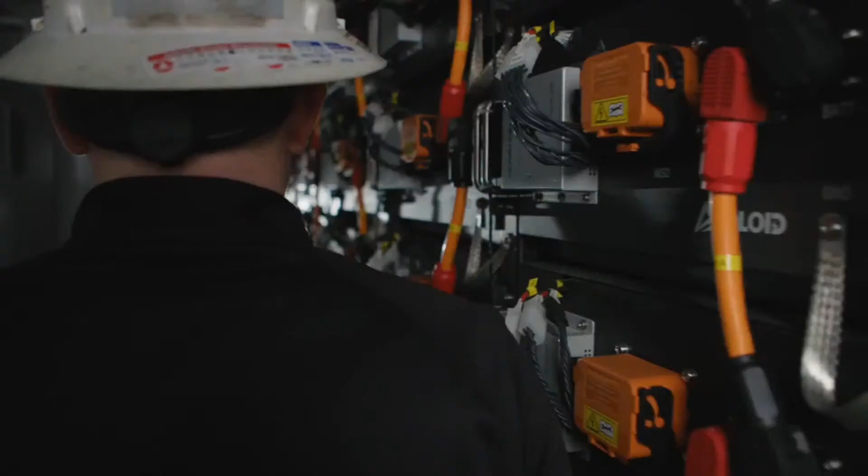Our newest alternative power technology is perhaps the most exciting, as Patterson-UTI expands the use of lithium-ion battery technology in our rig fleet. EcoCell is an energy management system that uses stored energy to decrease the number of generators needed online, and keeps generators running in their most efficient power-to-emissions ratio range.

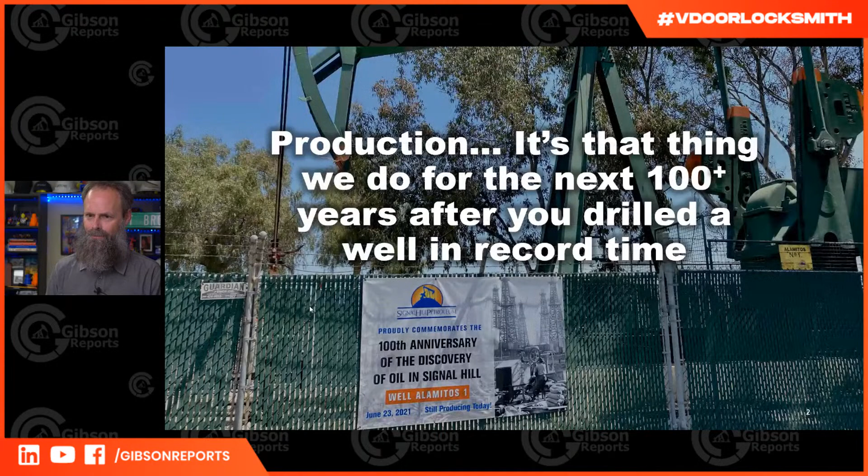Production is the thing we do for the next 100 years. This well, I took this picture in the background here - this is the Discovery well in Signal Hill, California, about 2 years ago during the pandemic. It hit its 100th anniversary, and all the stuff I'm going to talk about today, all the dynamometer cards and rod analysis, came in way after this well was drilled. So we're constantly learning new things - this is proof of it.

This well is still pumping - I drove by it recently. They don't have the sign there anymore because it's not the 100th, it's the 101st or 102nd anniversary now. But this well is still producing fluid. So when you drill a well, just remember it might be around for another 100 years. I love that slide - if you come out to California, I'll take you right by it.

All right, so rod pump - it's the most common artificial lift method. Everyone that thinks of the oil field thinks of the pump jack going up and down in West Texas. The first thing you need to understand about rod pump is it doesn't actually suck the fluid out. I've been in the industry for 20-something years now, and when I first got in, I didn't realize it's a long steel rod that goes down to a pump at the bottom of the hole.

Can I do a mouse over here? Does that work? Yeah, see that? So you got this long rod string attached to a downhole pump, and it's basically just two check valves that alternate and lift the fluid. It basically pushes the fluid up from the bottom. You get thousands of barrels a day, all the way down to stripper wells that barely produce anything - so it's a very wide range of production you can get out of a rod pump. Again, the rod pulls up on the pump, gravity pulls it down, and it pushes the fluid to the surface.

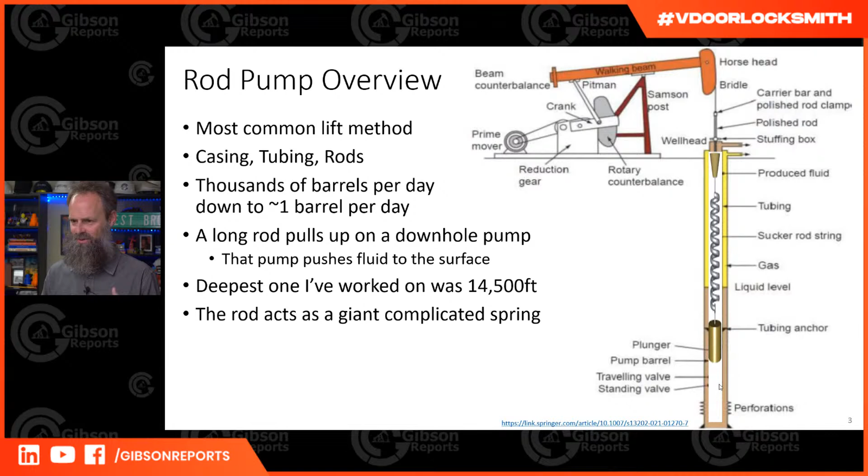If there are any questions, feel free to stop me. I'm just trying to soak all this in. So yeah, keep going.

I just put this slide in here so you can zoom in and see what the pump looks like. There's all kinds of variants of this, but it comes down to the same concept: you have a standing valve that's fixed, attached to the tubing. That valve is called the stationary valve or standing valve. It's stationary.

When you lift up on the plunger, which is this guy right here, the moving part, kind of the yellow or orange color - that's the moving part. So when you stroke the well, you lift up on the plunger. That traveling valve carries the fluid load while the standing valve opens. We're lifting right here. The traveling valve is closed, and fluid is entering the pump through the standing valve. So that's lifting fluid up, but it's also recharging the chamber of the pump.

And then here we go to the downstroke. This is right at the start of the downstroke, so both valves are closed. Here the standing valve closes, so now no fluid can fall back out into the casing annulus, and all the fluid transfers from the pump chamber up above the traveling valve, so that when we come back around to the next stroke, the fluid can be lifted.

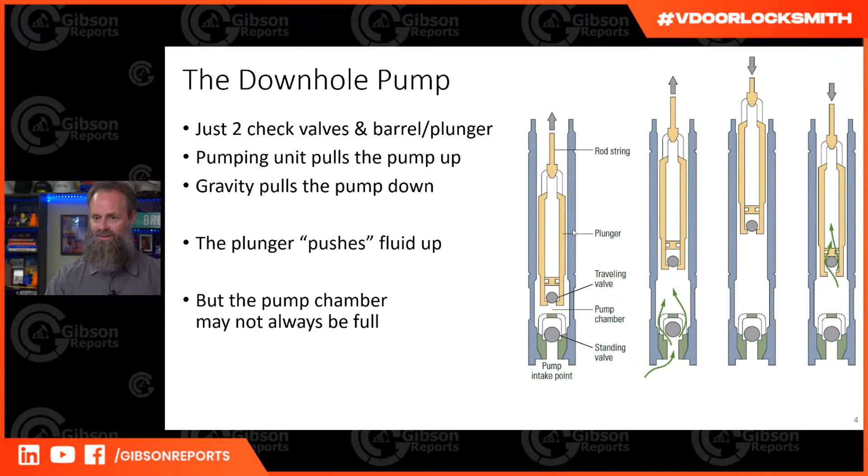So, all right, deviations - this is the crux of the issue here. When you have deviation... you know what, I should have - can we switch back to the thing? I didn't really talk about the configuration.

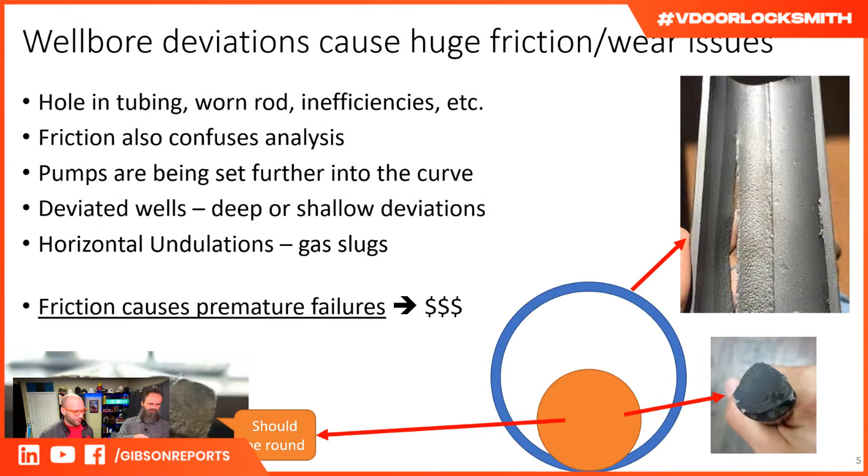You've got the casing, you all know that from drilling. Before I left, I took a piece of plexiglass tube and got the heat gun out and bent it to make a crooked wellbore.

In the rod pump world, we take tubing - I'm going to use this white tube, that's the production tubing. We stick that into the wellbore. The pump's down here at the bottom, you can't even see it. All the fluid's going to go up through this inner tube, the production tubing. And then we have the sucker rod here that goes in through the production tubing, and it's just stroking up and down through it. So you can probably see that where you have this crook in the wellbore, it's going to wear a hole in the production tubing, right?

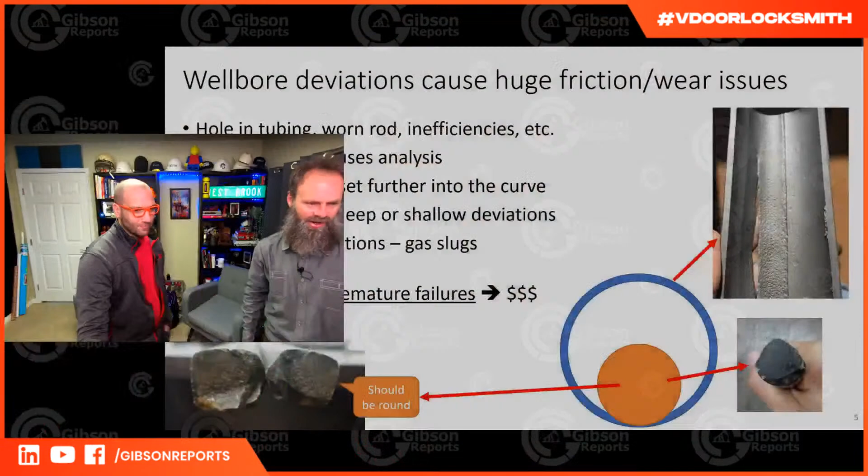So I have pictures — can you switch back to the rod cut? So up here, this is a piece of tubing that they cut in half so you can see it, but there's a nice track worn in here, and it just blew out. A hole in the tubing blew out. We got to pull the whole well and replace that joint of tubing because there's a deviation there.

Now, before I came here, I got some buddies that work at a pump shop in LA, and they gave me some pictures. These are the sucker rods. This guy right here, so this — oh, I gotta go over here. Yeah, then they'll see it. All right, there we go. Oh, there we go, all right.

So this should be a round rod. I mean, this is crazy — this is a square. It went in a round peg and a round hole, and it came out a square peg in a round hole because of the wear.

This guy over here is worn on two sides. The reason it's worn on different sides is because we do rotate the rods to even out the wear, but when it's so bad, the rods just kind of flop into their little track and wear on one side, then move over to another side and wear on that side, and then move over.

This cross section that I drew here, this is the production tubing, and this would be the rod. So right down here, this is where it gets pretty dicey — pulled into the side because of the side load, because of the deviation, and that's the wear. This is the wear that you see here, and then this round rod — this should be a round rod — was worn on this side because of that side load.

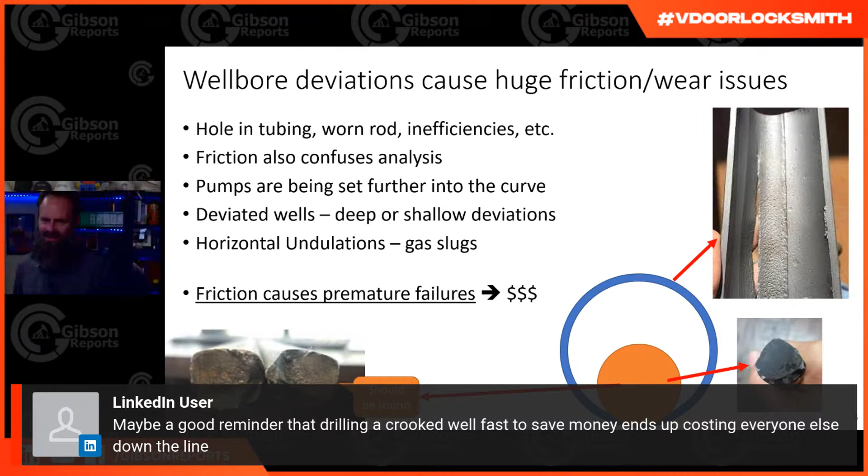I do have a lot of questions about speed of drilling wells. A lot of what I think is the problem is when they screw something up in the drilling and then they got to sidetrack out. I have a great story about some folks — I was in Oklahoma City, but they were from Colorado — and they were showing me pictures about this well. It would look kind of like this, but worse. And they're like, yeah, we got a week runtime on something like that. Like, what the hell, what's going on? What do your wellbore surveys look like? And they're like, well, we got the drilling surveys, but it's kind of missing that like 500-foot section where we're having all the trouble. So what happened? Well, the drilling guy screwed something up, and they just lost the survey for that.

And so stuff like that — when we get these drilling surveys, the points of interest never have the data that we need on the drilling surveys. So we come back through, and I got some slides on that. We run gyro surveys through the tubing so that we can actually really get a better idea of what the wellbore looks like. Wow.

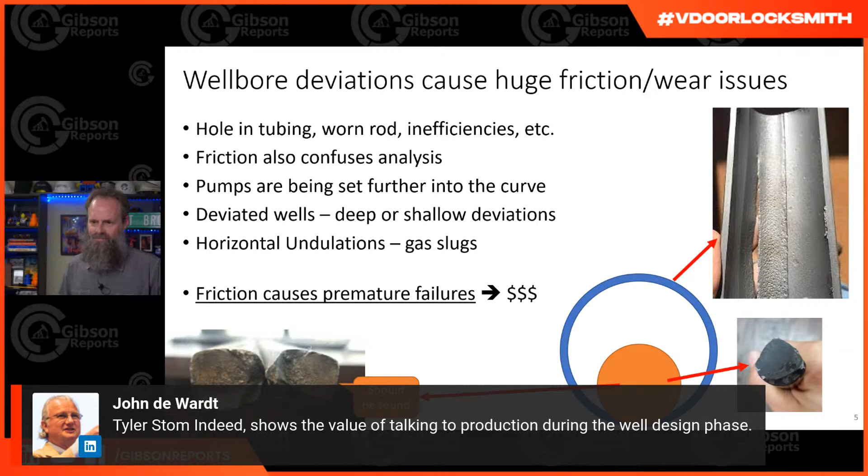John de Wardt says, Tyler Stom indeed shows the value of talking to production during the well design phase. Yeah, I love it. Yeah.

And if anyone wants to reach out, I know lots of folks that work in lots of companies on the production side. I can connect anyone up to talk more about this, because it's not just drilling. I got a slide about Wall Street. It's people saying, hey, can we really get away with that 5.5-inch casing? It's so much cheaper, let's just cheap out on something. It's not necessarily drilling's fault. Somebody made a financial decision that is now negatively affecting the next 100 years. So keep that in mind. If you're drilling a well, somebody like me is going to have to deal with it 100 years from now, hopefully.

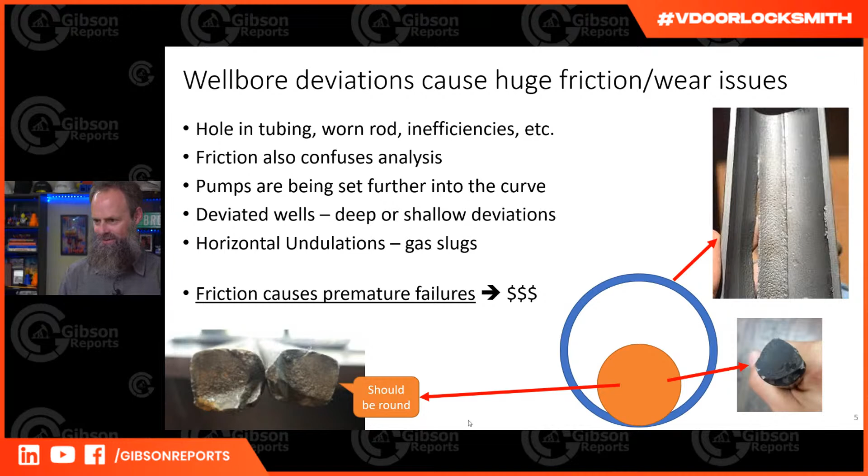Wow. All right. Let's move along. Let's go to the next. Can I get back on? Yeah, yeah, yeah. All right, sure, you're good.

So I talked a lot about this actually. If you think about it like compounding interest, every time you pull a well, that discovery well, every time that well gets pulled, it costs some amount of money. So that builds up over time. So what you're saving right now putting that narrow casing in, or not fixing that sidetrack and getting it nice and straight in that area, that's just going to compound over the life of the well.

So I don't have dollars in that. I reached out to a guy that did give me some dollars. When we have friction in a well, remember we got this big spring pulling up and down on the pump. Some of that work is being wasted to friction. So it basically makes the effective travel of the pump less. If you're stretching the spring every time instead of lifting the fluid every time, you're wasting some of that work.

That work you're doing at surface is just stretching that spring because of the added drag. So he worked out, it was like, I'm just going from memory, about 3 feet of every stroke was lost to drag because he ran out of a straight well, and with their deviation survey, the drag load on that pump made the spring stretch that much more. So he came out to like, I don't know, 500,000 or 5 million, something in there of lost production just from wasting that 3 foot of stroke every stroke. This is happening every day, 24/7, at probably 5 strokes a minute. When you work the numbers out, the cycle times on these are crazy.

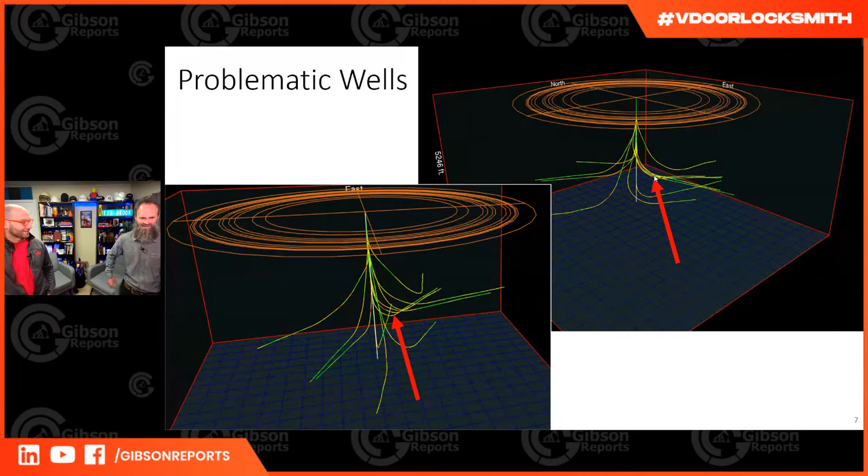Cool, all right, okay. So now, geez, we're 42 minutes in. No, hey, we've got plenty of time.

So I've got to talk a little bit about how we analyze rod pump wells, because that feeds into why I'm here and why I'm trying to talk about this drag analysis. We use a thing called a dynamometer, very similar to what you'd use on a dyno on a gas engine. It's a measure of work you do over the stroke. We instrument the well for load and position. The load is easy—we do a time-sampled load or weight, that's how many pounds you're lifting, and what the position of that load is throughout the stroke.

I'll show you the simplified position. I said position is a bit more of a challenge—there's some fun stuff I'll talk about with this tool. Basically, there are a bunch of different ways to get position. You can do it with an inclinometer, or with proximity switches on the crank arm—every time it goes around it gives you a top stroke, and you interpolate between those.

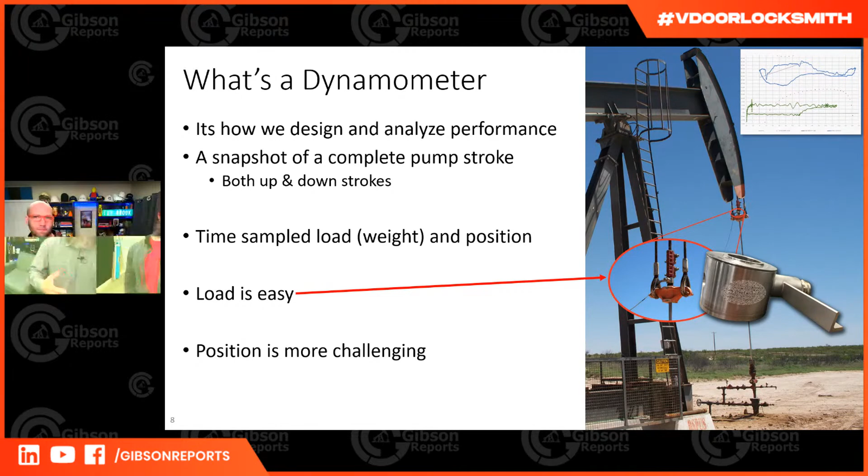All right, real quick, we've got a question from Ian. It says, how deep do the sucker rods typically go?

I don't know if there's a typical well—it can go from hundreds of feet. I'd say probably 1,000; you could have 100-foot wells. Usually about 1,000 feet down to maybe 15,000 is probably the deeper limit. Again, it depends on production rate. The 1,000-foot wells in a water flood making 1,500 barrels a day of producing fluid—you're not going to get that from a 15,000 foot well. It's just a matter of how much you're lifting.

The upper end, or the deeper end, is 15,000 feet. That's probably the easiest answer to that question.

Yeah, you might have to click there. There you go. You're all good, right.

So this is a wacky animation of the dyno, showing load and position. We gather those over time, but then we plot them against each other. This was my attempt to show you where they're coming from. I took a position plot, rotated it over, moved it to the side, and animated it. This is how you build a dynamometer card, by taking the load and plotting it against the position.

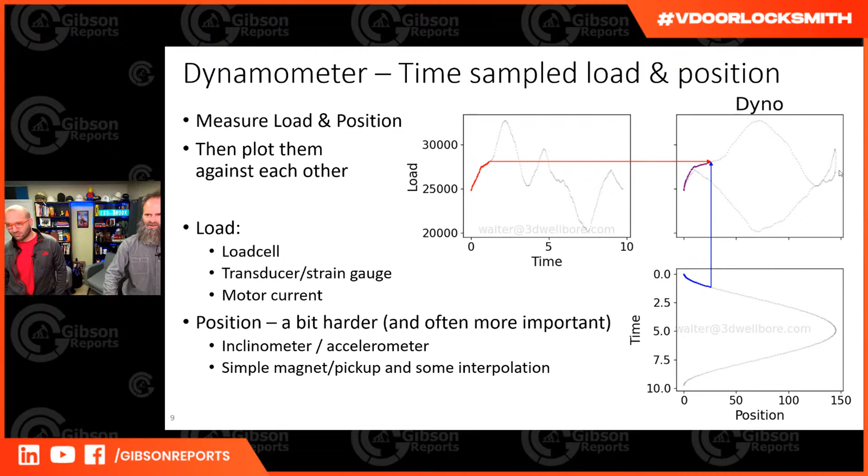And then here's just another view of the dynamometer. So I put this time-lapse picture up here. This is kind of like a snapshot of one stroke, so you're looking at the entirety of the stroke in one picture.

So here we have, I'm talking about work or power. We have horsepower, so 1 horsepower is 550 foot-pounds per second. Here's the foot dimension, here's the pound dimension, applying those against each other. And then there's this whole time concept of, this happened over one stroke, or, I don't know, I should have looked at how many strokes per minute this has.

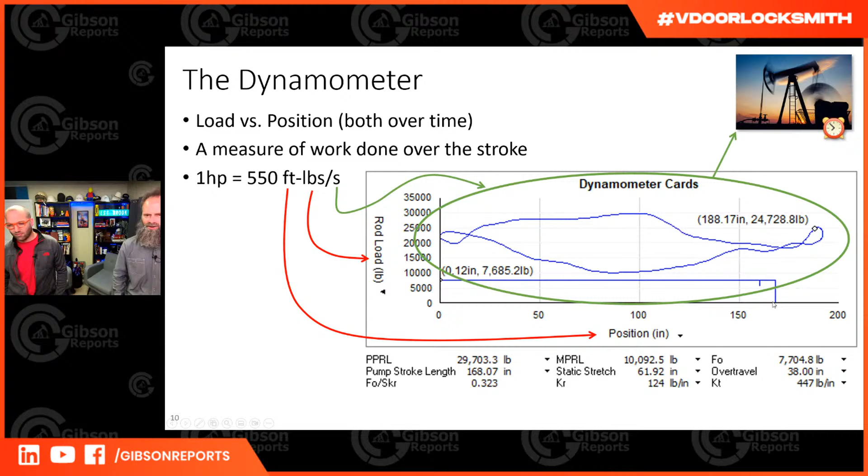Let's say this was a 10-second stroke going around. That amount of work has happened in that time. So we can actually take the area of this plot and give you a power, like how much power did it take. And then I'll also talk about this rectangle thing down here. This is a calculated downhole card. It's the same concept, but it's removing all of the stretchiness. I'll talk about that in a couple slides.

So the surface dynamometer cards, most of the ones I've been showing you here, are these wobbly, complicated things that are hard for people to understand. I mean, when you've been looking at it enough, you can look at a card and go, oh yeah, it's going fast, it's going slow, but can you really tell what's going on?

There's all these inertial dynamics. There's the crank arms accelerating, speeding up, slowing down. The rods are stretching, sometimes they're moving, they're starting and stopping at different points in the wellbore if it's really deep. It's hard to look at these surface cards and really see what's going on.

The fun story about that is the guy I'll talk a little bit about, Sam Gibbs. He was getting his math models going right around the same time, and they were going to use this to do all the design and simulation. And he comes in and says, 'Well, I can just calculate this. It's just math. I can figure how to build these cards from math and not have this crazy analog computer.' I think it had springs or something. I don't even know what that means.

But it shows the work done stretching and accelerating the rods, work wasted to friction. But we really only want to have a snapshot of what's happening at the pump.

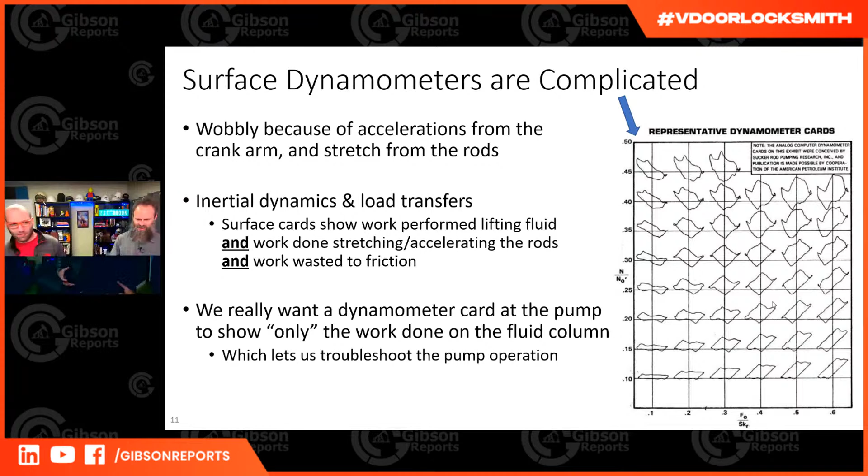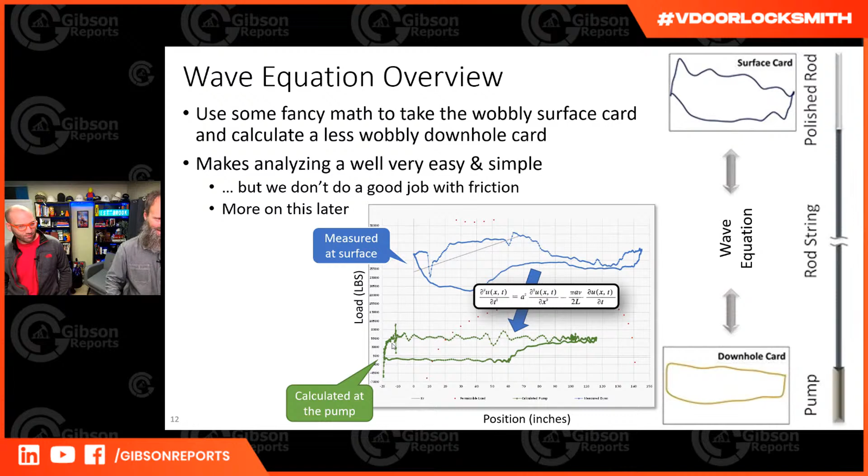So now there's some other things that happen in there. We don't really deal with friction so good in this model, but that's actually the point I'm trying to get at here, in the second half of this talk, which is going to be quite long. So in the 60s, this guy, Sam Gibbs, he comes out with this paper.

I put the paper number up there. So anyone that knows SPE papers, it goes to OnePetro. I mean, paper 588 - that's how long ago this was. There's 10,000s or 15,000s or whatever now. So he figures out this math and simplifies it over the years. That's what we use - we call it the wave equation.

I guess this is probably where I should stop and ask questions, because this is the part that - no, keep going, keep going.

Yeah, the simplification that the wave equation gave rod pump analysis made it so that we could look at a well and say, oh, this is what's happening, we need to pull this well, or oh no, it's doing this. So that was great in the 60s through the 80s and whatnot, when we were drilling basically straight wells. But now that we have super gassy wells and crooked wells, it's not as easy as this.

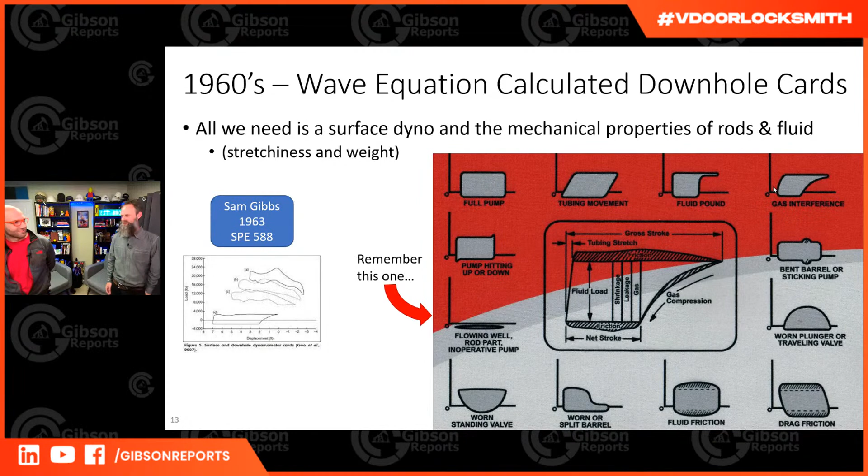So I'm going to try to apply the wave equation, using this concept of the rod part, to see where the friction's happening in the wellbore. That's the tagline of the next half of this talk.

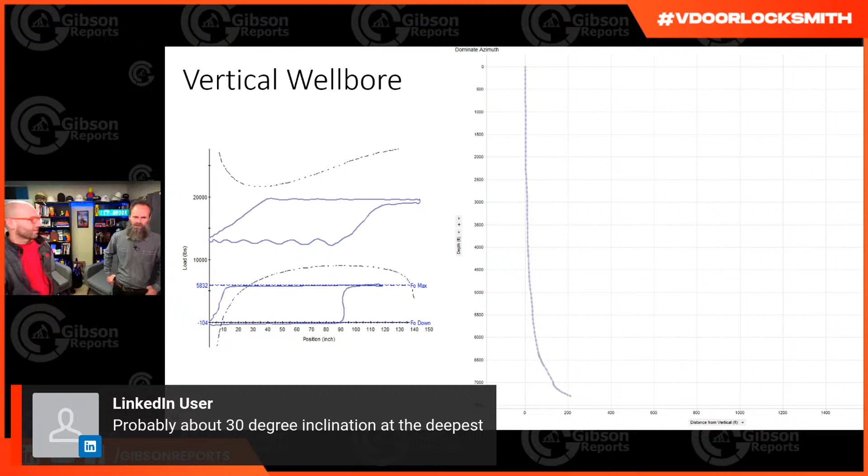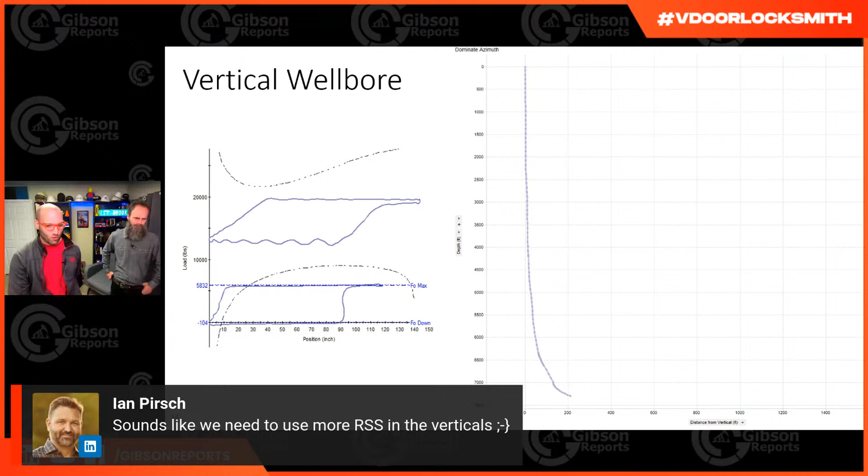Right, and John Dawson, or a couple of comments here - we've got, probably somebody says probably about 30-degree inclination at the deepest. I'm not really sure, that was probably. I mean, people run pumps way on the horizontal too, the pump itself will run anywhere. And then Ian says, sounds like we need to use more RSS in the verticals. And then John Dahl says, mouse pad is 1960s artificial intelligence.

So, all right, yeah, all right, let's keep going. All right, over here.

All right, so we did a presentation. One of the things that I'm involved in is a downhole dynamometer project, where we're actually trying to measure these dyno cards downhole.

They did a version of this in the 80s, where they built a tool that would go down in the rod string and gather these dyno cards. It proved the math worked, but they only did those on straight wells. So what we wanted to do is redo that project on deviated wells, because we don't really handle friction in the math as well as we should. We want to see how we can improve our models. I stole these 3 slides from that presentation.

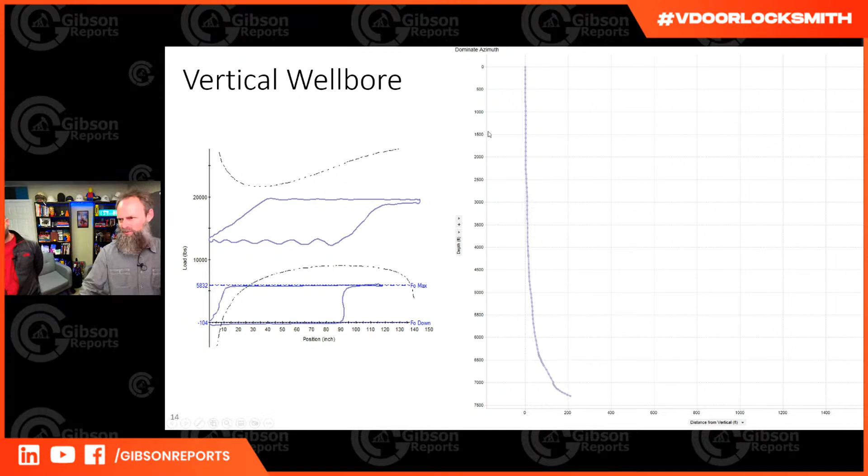So this is a relatively vertical wellbore, nice, kind of straight, maybe veers off a little bit. This is actually what I was talking about with the dimensions. We go from 0 to 7,500 here, but from 0 to 1,400 there. So we're like 4 times taller than we are wide. I don't think I did the math exactly right there, but this is squished - it's exaggerated. This isn't as bad as it looks.

But when I look at this card, I can see that this well's probably running relatively slow, but it also has some unique shapes here. Go to the mouse pad, look it up, and we can see maybe a little bit of tubing movement. It's got this little slant to it, but really we see this signature right here - that's fluid pound. So we can analyze this well and say, okay, that's what's happening.

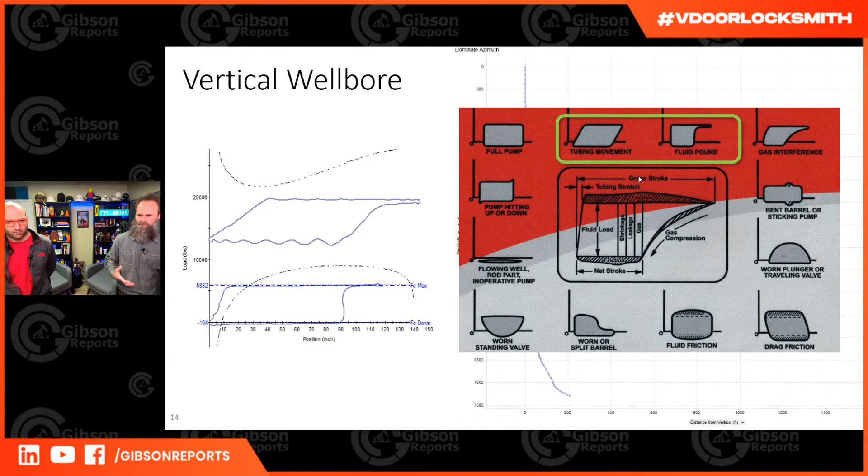So on our controllers that control the well, we can change the set point - it might slow it down, or it might stop the well. If we have a VFD on it, we might slow the well down so that it matches the inflow to the pumping rate. But when we start getting deviations, here we have a deep deviation.

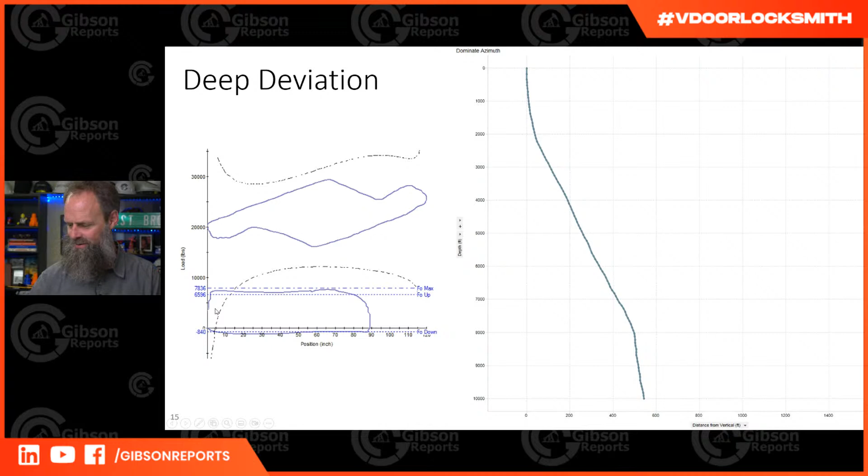Here we have a deep deviation, and now it's a little bit wonkier. It's kind of rounded over here, kind of rounded here a little bit. Could we say maybe tubing movement? Let's look at our cheat sheet here.

So what's going on? It's not the top left one, I can say that as well. It's definitely not a flow. I mean, it's probably a full pump, but what is it? Can we really tell that? Can we tell if something's going wrong here? It's probably not the pump hitting down - we'd see a tag, what we call a tag, a little load increase.

It's probably not a bent pump barrel. If you didn't realize that this was a deviated well, you would say hey, this bump right here might be a bent pump issue, but it's not really.

This is probably more of a fluid acceleration, a worn plunger or traveling valve causing this rounded over shape. You might look at that and say that's what's going on, but I wouldn't be confident in that. And fluid friction isn't happening there - it's probably drag friction, but where in the well is that? How bad is it? What is that obscuring as far as further analysis?

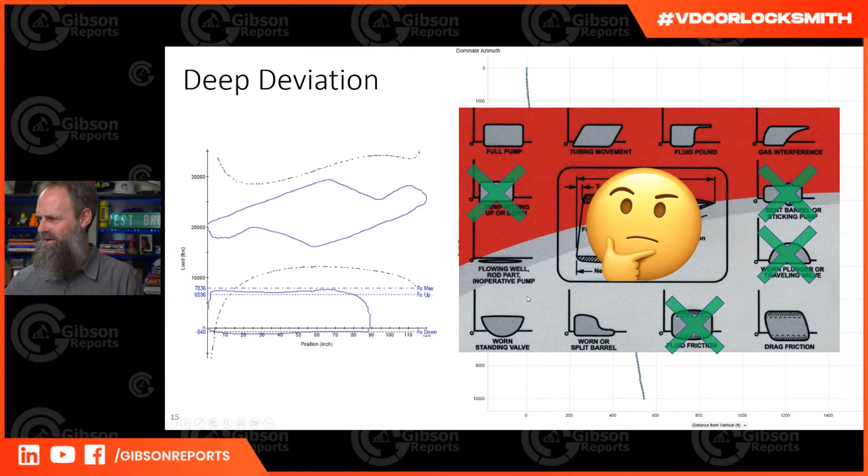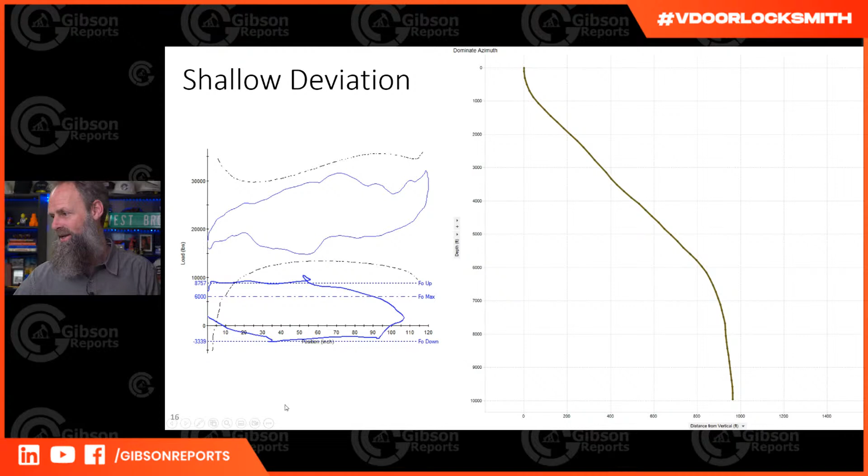And now here we have a shallow deviation. These are the really tricky ones, because not only is the load increasing, which is increasing the side load, which is then increasing the tension load - so that screws everything up. Now you got this downhole pump card that you'd hope would be a nice rectangle, but now it's this weird stretched out, twisted up thing. So you look at this and you go, I can't tell what's going on in that well.

Well, what's going on? I mean, we're just going to run it until something breaks. I mean, that's unfortunately how most of these rod pumps end up.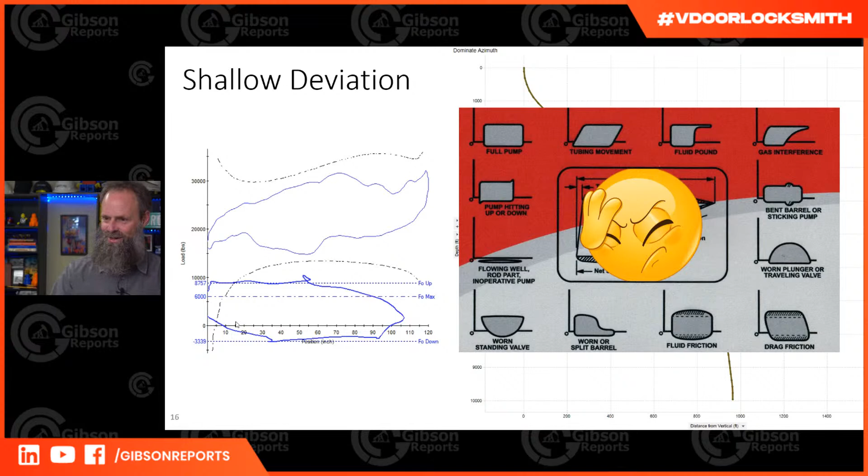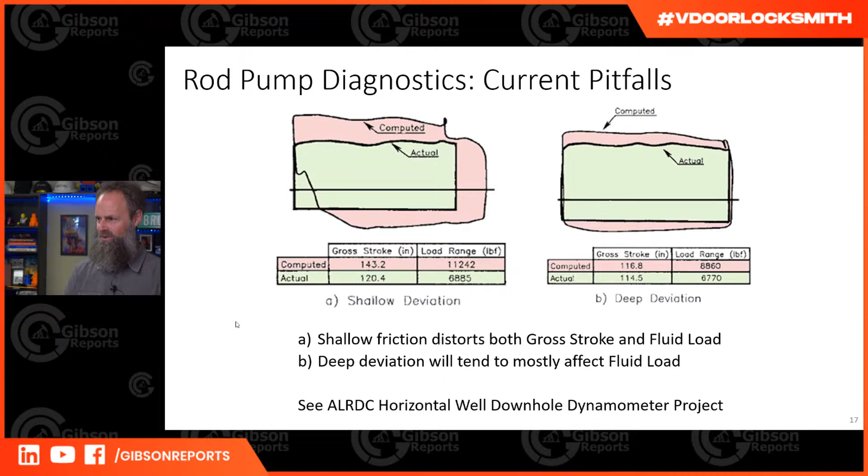And here's just another shot of this - so we have the computed cards and the actual cards. This project that I was talking about, we're actually building a tool to go downhole to measure these cards in the well in deviation, so we can better adjust our models to include friction. If you have any questions on that, give me a shout.

Yeah, I did this - I put this in an SPE paper, I wrote this a while ago. Some of the 3D wellbore stuff that I did, I realized hey, I can use that same kind of plotting that I developed for that, and I could plot what's going on between the surface and the pump. So I just threw these in there because they're colorful plots.

So basically what this shows is each of these lines at a distance along the rod string. I'm recalculating, redoing the calculations at each step. It's a finite element analysis. There's a lot of cool stuff you could do with this because you're taking load as one dimension, position through the stroke as another dimension, and position as depth from the stroke, but then you also have this whole time component in there. There's all kinds of fun stuff here, a whole other topic I could talk for hours on, but basically it's a finite element analysis.

And that's actually one of the methods we use to calculate the cards. Finite differences is the mathematical term. I kind of suck at math, so that's about as comfortable as I am talking about that in public.

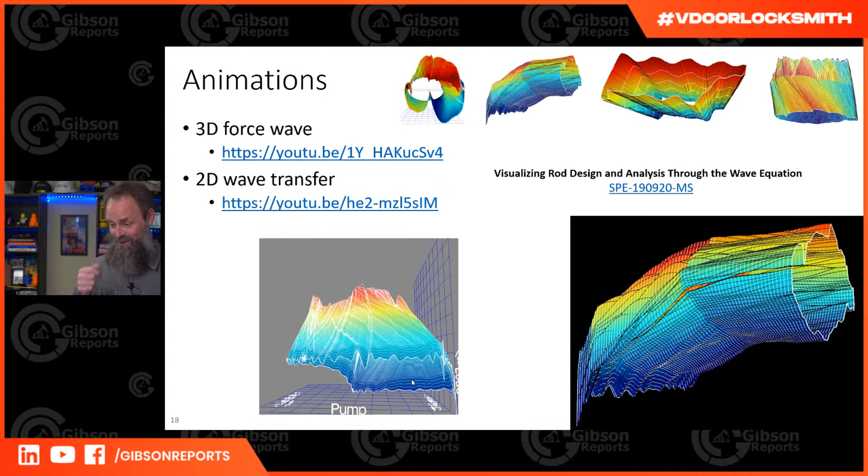Looks like you're a lot more comfortable with math than I am. Oh no, I'm just persistent. I worked through all of this, but it took me a long time. All right, I could play those videos, but we're probably running out of time. I posted them a while back. There's no time constraints. Well, I haven't even gotten to the fun stuff, man.

We have a LinkedIn user who says very informative. Thank you, I think this is a lot of new information for everybody on the drilling side. So there's definitely a lot to cover. Sorry if I'm going fast, I usually tend to be quiet 90% of the time, but when I start talking, I can't shut up. And I also steal a lot of presentations I've done in the past.

So I put this one in here because it's fun and it shows deviations, not just from drilling. When we put this tubing in the wellbore, we'll also put an anchor in it and stretch the tubing. It's kind of weird when you pump tubing that's loose in the wellbore, it acts like an accordion, shrinking and growing. The problem is all that slack goes to the bottom, and the tubing being slack at the bottom corkscrews around, creating side loads that impact the rods and wear them out. So if we pull tension in the tubing by anchoring it, we can stretch it out and keep it straight so the tubing doesn't deflect into the rods.

This came about with a guy up in Montana, wish I could name names but I don't know if I can. He was having issues because they were putting a lower grade of tubing in. It was a hot well, so they were worried that pulling the tension needed to overcome the temperature elongation would overload the tubing. They said, well, we can't pull that much tension with this grade of tubing, but we were getting deep rod cuts and holes in the tubing because that slack was ending up at the bottom.

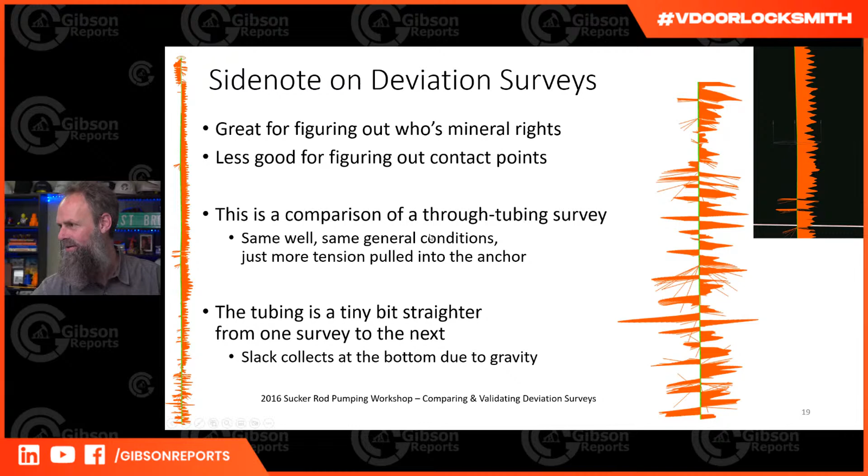There we go. Yeah, so I threw this in, it was part of that talk. My last dog, when I was doing this, she blew out her knee. I was prepping the slides - this is 6, 7 years ago - prepping the slides and the vet... I feel bad telling the story now. I mean, I told it then when she was alive. I'm like, I need that picture because I'm doing a talk on dog leg severity, and this is perfect.

It's literally the dogs. Yeah, so there's a whole thing, the golden retrievers, they blow out their knees. We got another one, so great dogs. But yeah, so we got the very expensive X-ray so that I could milk that X-ray for probably 3 or 4 different presentations.

So the point of this slide though is we always like these rules of thumb. Folks always say, hey, keep it under 3 degrees for your dog legs in your wellbores and you'll be fine. It's probably a good rule of thumb - if you're going over that, there's probably a problem - but I'd say it's probably not the best rule of thumb. The straighter the better. The deeper you are, the more you can deviate. If you're shallow, don't deviate at all.

Also, degrees per 100 feet - that's a terrible measure. I've had people ask me all the time, hey, I got these gyro surveys and it's running out to 90 degrees per 100 feet. Well, because there's confusion on how you scale. If you have a 1 foot survey and it changes a lot in 1 foot, do you just multiply that out by 100 feet and that's what your dog leg is, or DLS, for 100 feet? There's a lot of confusion in that world.

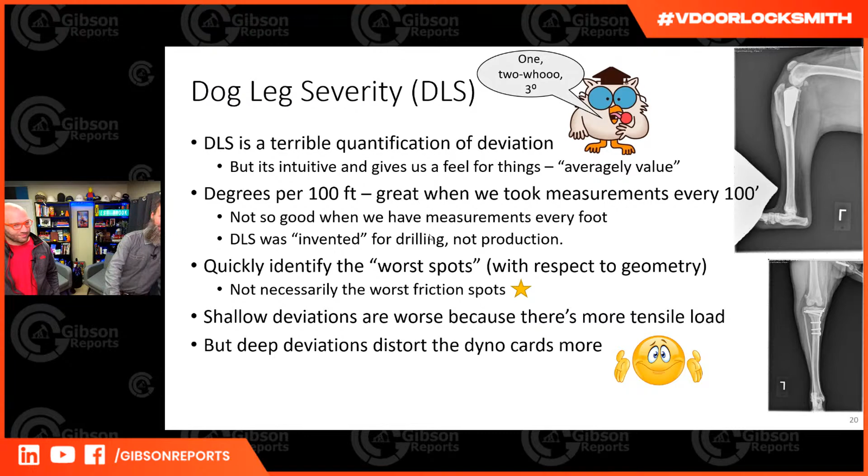So this is the guy that I talked about. He's the guy that invented the math. I was fortunate enough to meet him. He had this thing called the Gibbs conjecture.

This is probably the craziest theory thing that I'm going to throw out at you, because we don't adequately deal with friction in our calculations when we're doing these wave equations, or this wave equation math, at least on the measured side. So there's a whole other parallel side where we take theoretical loads and positions, but at the surface and at the pump, and we try to figure out what the pump should be doing.

There's two different approaches to this. There's the diagnostic approach that I've been talking about, but then there's also the predictive approach, where you try to figure out, hey, I have this well and I want to put a rod pump in it. What's the pump card going to look like? You can run out the theoreticals that way.

And there's some software programs out there that do include friction in that and do deviated wellbores, but the results are kind of iffy at best. So the reason for that is the Gibbs conjecture. He says basically any error, if you don't account for friction, it's just going to end up in the pump card, right? So it's pretty simple, pretty basic.

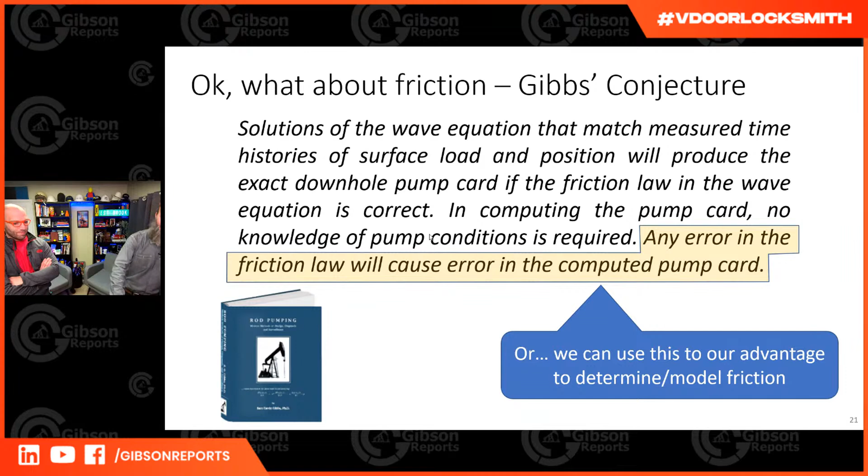I have an analogy here that my buddy Lynn Rowland said: the pump card is the trash can where all the friction ends up. So with those slides that I had with the distorted pump card, that's what I'm showing here. That's, you could call it now, a trash can because it doesn't look great. But what I want to do, what I'm going to talk about here shortly, is use that to my advantage.

So when you're pulling the well, when you have a workover rig and you're pulling each stick of rods out, if you calculate that trash can over that length of rod that's in the hole, well, now you have a measure of the cumulative friction acting on the length of rods that are in the hole. And then you have a shorter length of rods, and then a shorter length of rods. And if you calculate that for each of those lengths of rods, maybe you can map the friction of the wellbore. That's the theory, and that's the tool that I've developed, and I have not had a ton of time to analyze the data.

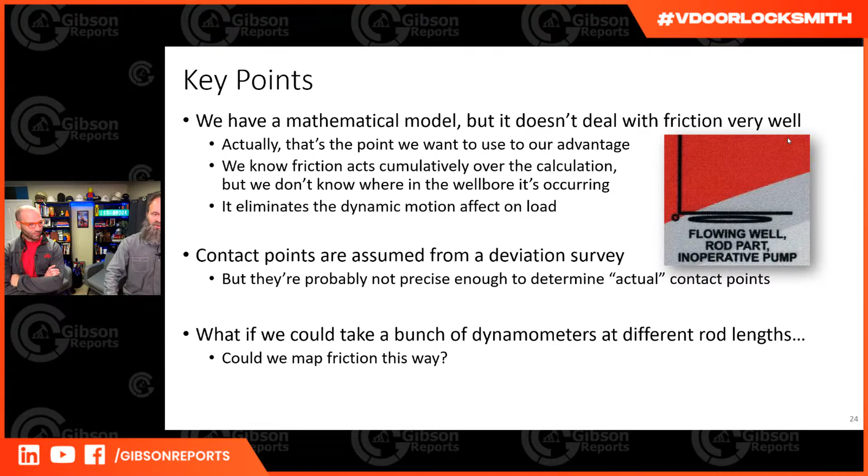Questions? No, nothing from me and nothing from the audience. If y'all do have any questions, feel free to throw them out there. I'm learning a lot today.

So I got a picture. Remember I said it was Sam Gibbs? This is one of the controllers he developed. His name's Sam, so they called it the Sam controller. They've since renamed it.

He would always say, I wish I knew the numbers, but they've got so many of these controllers out in the world, so many thousands, running it maybe 6 times a minute. He would tell you how many times a day his wave equation was solving because of all these controllers out there. He was a great guy, super smart, super nice. He was the kind of guy that would tell you you're an idiot, but in the nicest way possible. I'd ask him questions, he'd go pull his book off the shelf and just read a page out of it. I'm like, yeah, I read that, but it's easier for me to ask a dumb question than to go look in a book.

So anyway, I said the workover rig generates the data. So can we measure it?

So this is my time machine. Way back in 2019, I started doing some other sensor projects, and I was like, hey, it's a load cell, I could just stick some sensors on something to measure what's going on with the workover rig. Nothing exists, so maybe I could just build one. That was back in 2019 - I looked it up, the first time I talked to you was January 2020, and the world shut down about a month later. This project has gone through some very interesting quirks over the years.

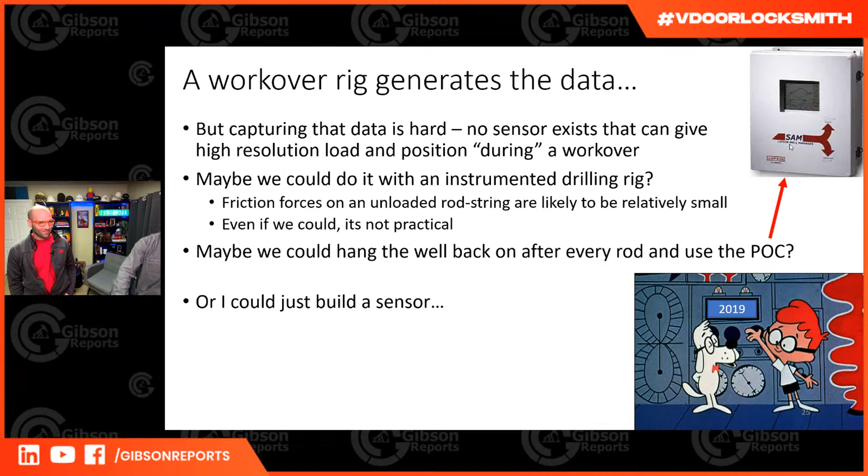So let's talk a little bit about workover rig technology. It's not a drilling rig - I mean, they can do some, they use the same terminology a lot, but you get the hydraulic load indicator that works off the deflection of the cable. Sometimes, especially when they're running rods, they'll double up the drum so both cables are running, so they can go extra fast - but then you don't even get load, there's no load indication, so it's just up to the tool pusher to know if he's overloaded. Which is pretty obvious, since you're dealing with less than 50,000 pounds of load, so if your rig's bogging down you'll know. But even if you have a load indicator like that, you don't have enough fidelity in that measurement to tell whether it's friction or just noise.

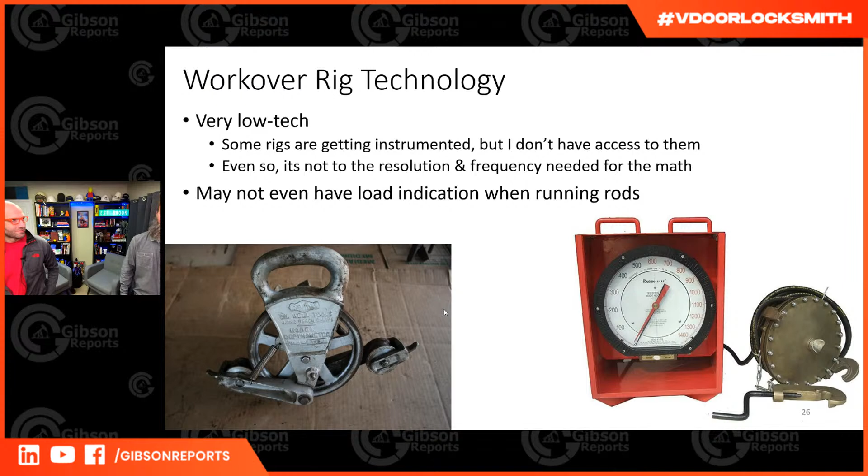They also have this other thing here, for the sand line - it's a wheel with one of those counting wheels, every time it goes around it clicks a number. That's what they use on the sand line to measure position. Really, you don't need to measure position on a workover rig because you're just counting joints of pipe or sticks of rod going in. So nothing exists on that.

So I ended up having to develop one of my own, and that's down there. Is this a good time to show that? Oh yeah, it's heavy. You want to flip the camera? This is version 2, with less crushable plastic. Basically this just shackles in - I got a picture of that so you can see how big it is. You shackle that into the rod hook.

Should I tell the story about the dog? Oh, actually that's the next slide - I'll tell the story about it. I've had so many stupid roadblocks on this project. So I got it working. I've basically been asking people, hey, I got this wacky thing I want to run on your workover rig.

Can you run it? I fortunately have a lot of good connections out there in California. One guy, Rennick, he's great, always up for listening to me talk about my wacky theories. He was running his own field, had his own workover rig, and I kept bugging him, hey, can I run it? Yeah, okay, go for it.

The first one, I got a picture of it, I'll show that, where I just took the first version of it, wrapped it up in a bag, and stuck it on the blocks because I just wanted to see some data.

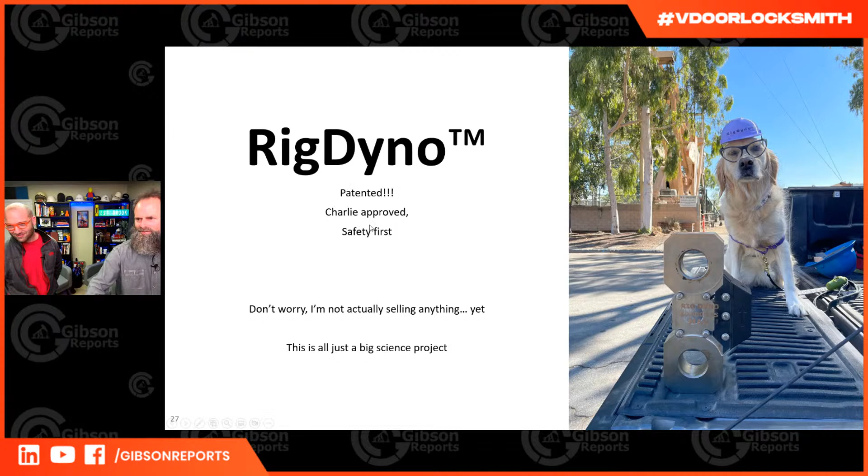So get back to that. It's prototype logging the high frequency data that I need to run through the wave equation to do this process, or to process this for getting rid of the dynamic effects.

It's a battery powered device, which is really the scary part about it, because I was personally worried about somebody whacking it with a pipe wrench, but turns out when it's on the rig it's actually safer because it's above anyone's head. So unless the guy in the derrick whacks it on its way up, nobody can actually touch it. It's safer on the rig than it is on the ground.

But it's still a battery powered device, so I'm working on a shield and stuff for it. I do have a live feed, so you can see basically a rough position and the load. There's some utility in that just for the rig crew, but it's really logging the high frequency data so that I can post-process it.

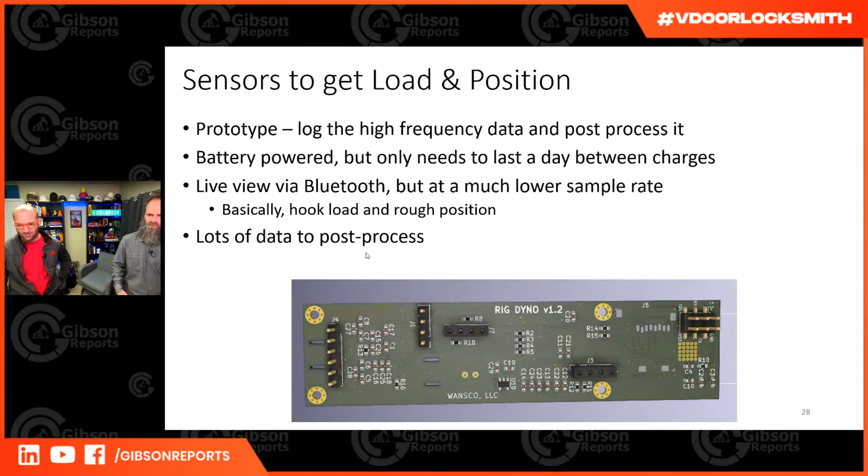Here we go, this is what it looks like on the rig. So it needs, this is this guy right here, it needs a second shackle. This is the rod hook, this is what they actually use to lift the rods. These are the bales that go up to the blocks, to the cable, and lift it up. Usually what they do is just shackle the rod hook straight to this, so I'm just going in line there, reading the direct load off of the rod hook and the position at that point.

The load and position need to be synchronized in time, but also at the same place for you to run the math out. Once it's installed, it's just, don't whack it with a pipe wrench. That's the biggest thing.

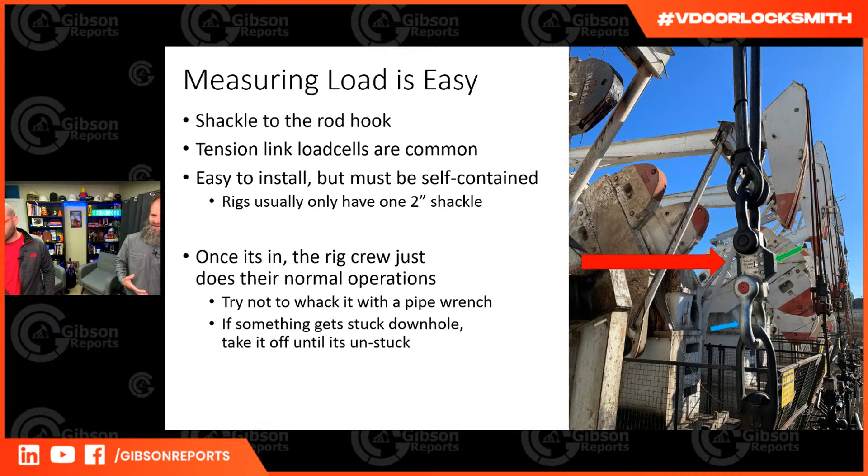I should have brought the other one, but it actually had a battle scar on it because I got the 3D printed stuff, so there's just a little nick out of it. I'm like, oh, finally nothing bad happened, but it actually got whacked with something. And if they're going to overload it, or if something gets stuck downhole, just pull it out, just for safety.

Here's the general process, and I've oversimplified a lot of this. Basically, you've got the blocks, here's the rod hook, and then here's a stick of rod. They have these things called rod elevators, there's two of them, they alternate out. So one's on the rod table holding the rods, while the other one's on the hook going up to get the next one.

So right now, here on the A, here, open it up, we're on the plot. We have the load, which is the red-yellow line, and then the position is the black line. So basically the idea is I'm gathering the load and position.

I'm plotting them separately on the same plot so you can see the blocks are high here at point A. The blocks are high, the load's low because we don't have any load.

We're not lifting the rods. Then we go to B here. We take the rods, stick them on, thread them in. We're going in the hole, thread the rods on, and then we lift somewhere between B and C here, so the load comes up.

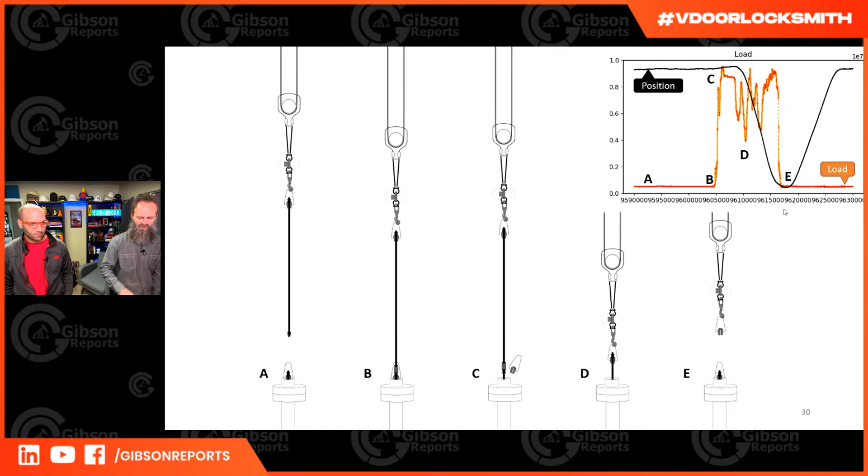That was going in the hole, so the same process goes in reverse coming out roughly, where you're just alternating the rod elevator onto the hook, then lifting the rods and setting them aside. It's basically the same. I talked a little bit about this.

What could go wrong? I filled out two full slides on all the stupid things that happen.

I got a great story from the last one. I'm going to get to that because it's hilarious.

It's still a prototype. Basically, when I get a rig crew, I buy them lunch. So at some point, hopefully, I'll flip that to where instead of spending money to run this, somebody will pay me to run it. But right now I've had to fix a bunch of stuff on it while I was gathering the data.

I had some timing issues, I had some sensor issues. I mean, it's a prototype, so I was working through all that. I'm pretty close on that now. I have a data set that I think I can run through the wave equation.

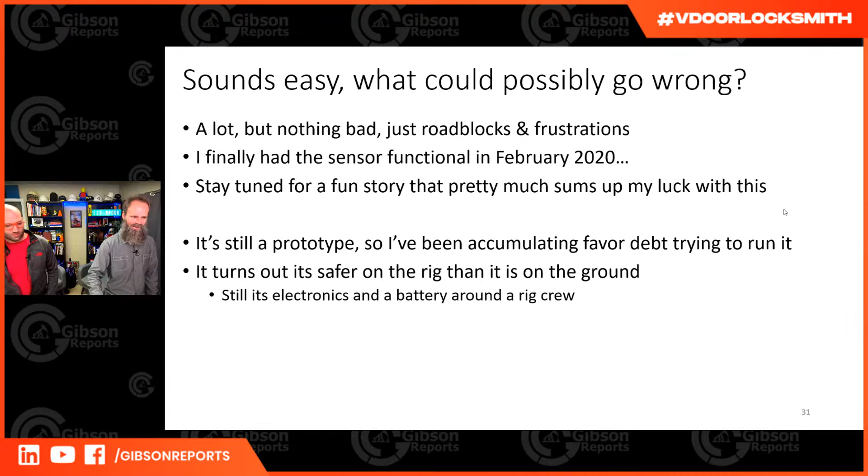I just got that before I got on my road trip out here. Turns out it's safer on the rig. All right, so first time I ran it.

So this is the story about the dog. The wife and I were going to Galveston, it was the big SPE artificial lift conference. And I get the call - oh no, it was Black Gold the week before. The folks I work with at Black Gold, the pump shop that gave me those pictures of the square rod and the round hole.

He's got a well in his yard that he always does fun experiments on. So I come up there one day and they're pulling the well. I go, Mike, what's going on, you're pulling your well? He's like, it's a new rig crew. I'm like, oh okay, I get it. But I mean, it's a missed opportunity.

But Rennick's pulling a well tomorrow just down the street, so I call Rennick up and he's like, oh yeah, I think they were running rods in. They'll be running rods in at, I don't know, 10 o'clock. And I'm like, perfect, I've got to drop the dog off at my mom's house because we're getting on a plane the next day to go out to Galveston.

We did like a Houston thing, vacation/working thing. So I got to drop the dog off at my mom's house, who lives kind of in that area. So I'm like, oh perfect, okay, 10 o'clock, alright, I'll drop the dog off at my mom's, I'll have plenty of time. I'm driving up, about 9 o'clock I get a call from Rennick.

He's like, hey, are you there? I'm like, no, you said 10 o'clock. He's like, oh, they started early. Like, when does a crew ever start early? It's always later. So it's like, if you don't get there right now, you're going to miss it. So I'm like, well, I guess, dog, you're coming with me to the field.

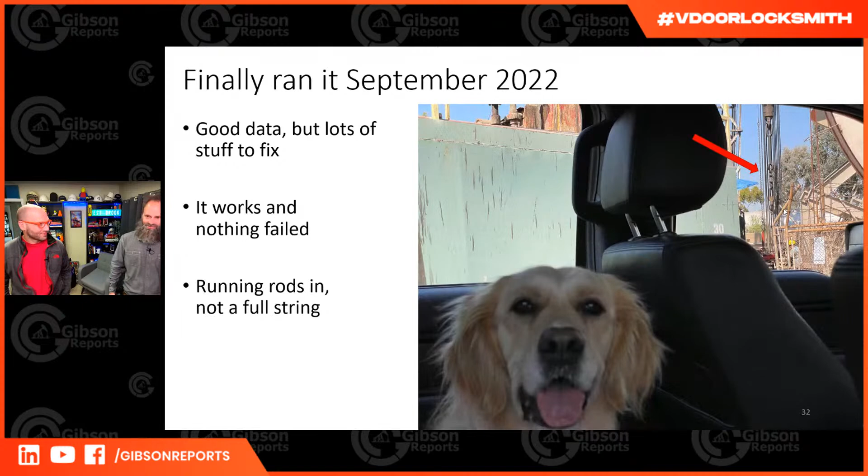So that was the first run. Had lots of stuff to fix, but it proved out it worked. I saw it. Now I can say to somebody who wants to run the first experimental tool, hey, it actually worked, here's what you can see from it.

So then I get another one. The day before this picture, I go to another location with it, and I'm like, hey, can I run it? They're like, yeah, cool, go, they're pulling well right now. So I go over to the crew, and I didn't have a second shackle, so I couldn't run it. But he's like, oh, but we're pulling this well tomorrow.

I'm like, I got to go get the dog. Now I'm going to bring the dog back. And of course, with the dog there, everything went perfect.

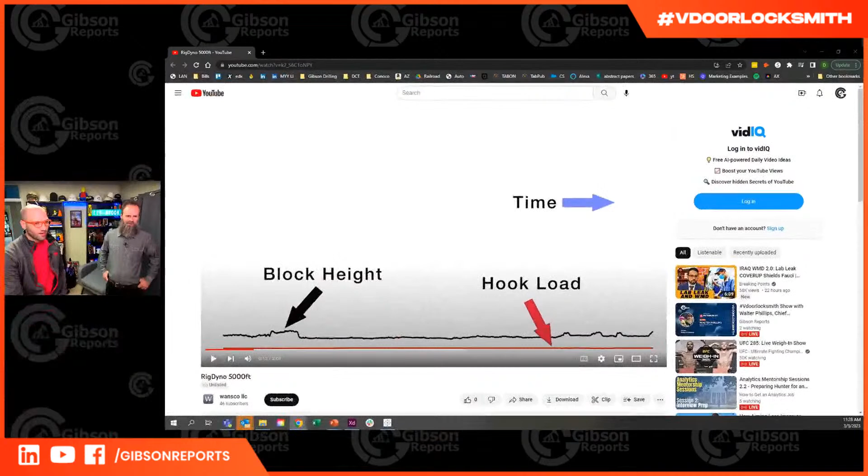Is it gonna? Oh no, it's not gonna. Hold on, guys. Move. Present, share screen. Let's do entire screen, let's do that one. Share. And the stream. Oops, put it on that one. There we go. Oh, there it goes. Or is it? Yep, there.

Yeah, just pause it there. All right, so this is that same plot that I showed earlier. It's just the block height is the black line, the red is the hook load.

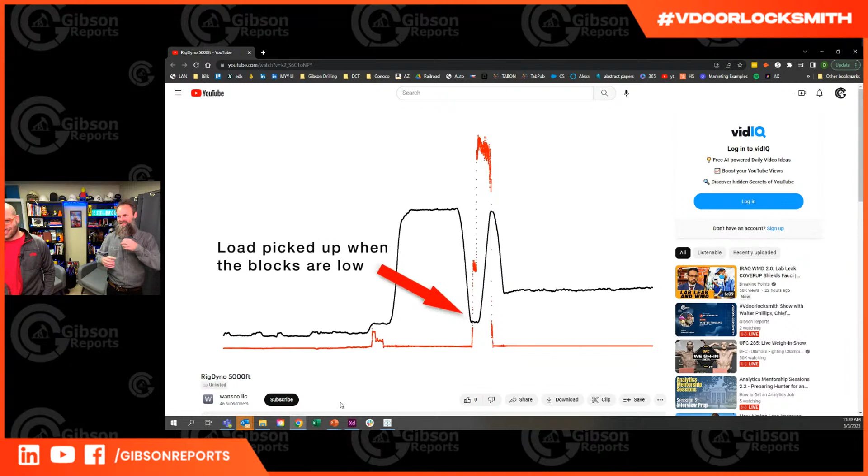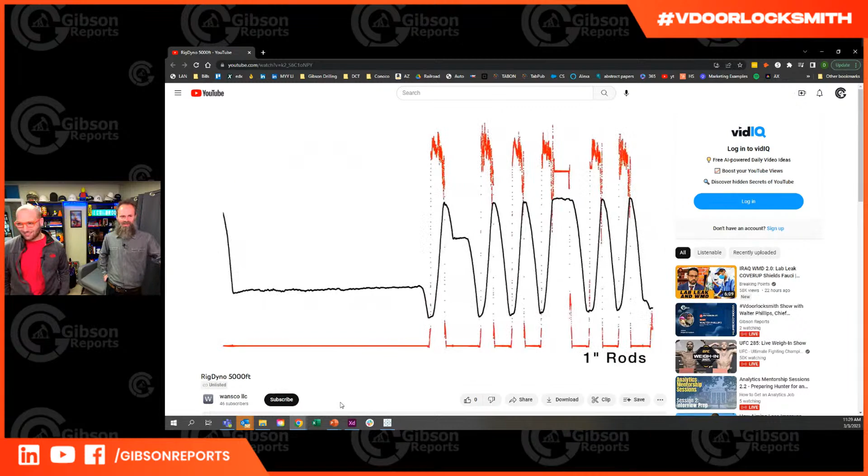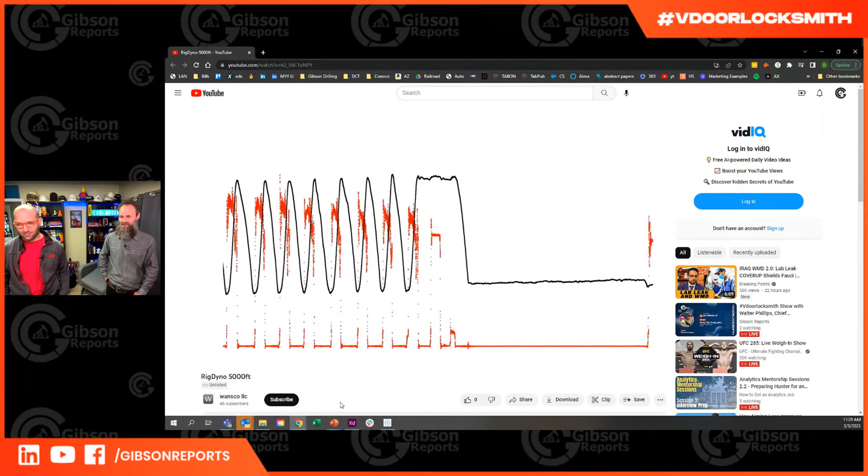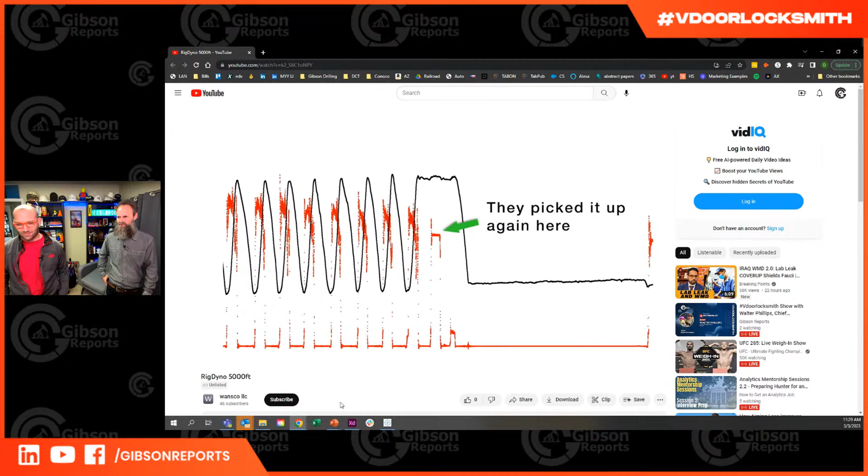So anyway, you can see each of these things is a stroke of the rig when the load goes up. So something wacky happened there, I'm not sure exactly what. I remember there was some yelling and something happened. Here the load dropped off, but then they picked it up again, and then they picked it up again right there, and then they finally dropped it off.

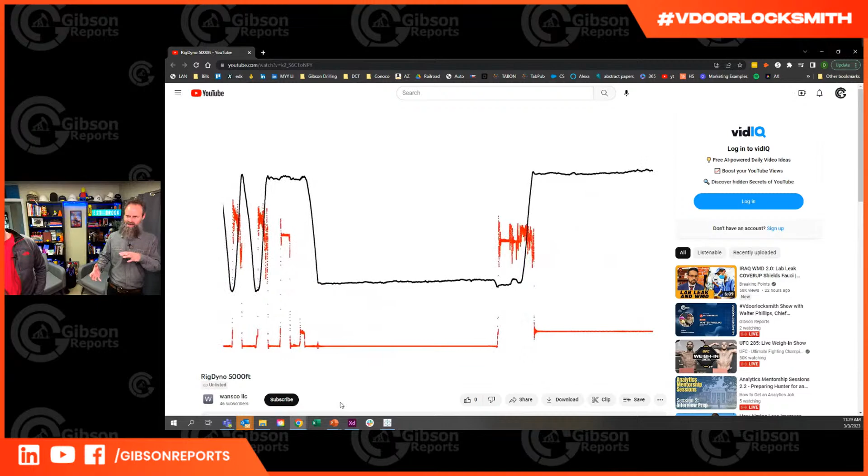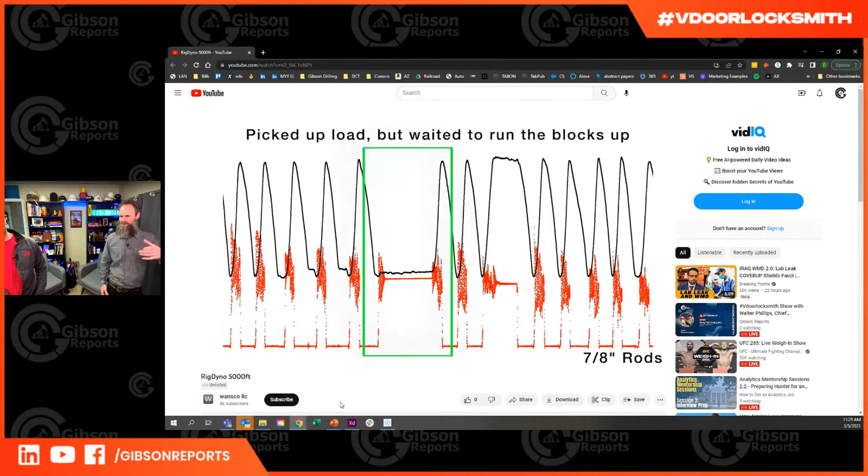So figuring out what was the stroke and what joint of equipment went in or came out is a bit of a challenge, because there's not a lot of consistency. There's one right there in the middle, that's weird, they dropped it down. Here's another one, they picked up the load. They waited, I don't know what they were doing there. Here they held the load at the top.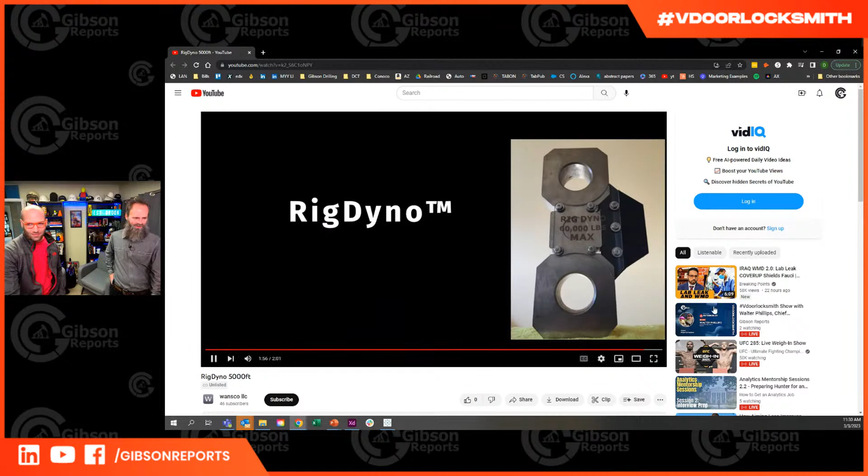And we can switch back. That's pretty much that. Oh, there we go. All right, we're back.

So I had some temperature and timing issues that I had to work out.

Accelerometer issues. Oh, I didn't talk about how I'm getting position. This is the cool new exciting thing.

Part of the position, so the black line that I've been showing here, that's entirely barometric pressure. Just like what they use with airplanes, just the height of the pressure, the air pressure of the tool. When you lift that up, it's less pressure than it is down there. So that's what I'm using for one measure of position.

It turns out it's pretty good for like, are you high or low? Is the blocks, are they high or are they low? You can get like to 6 inches of that. There was some issues with that.

If you watch that video again, knowing that, and you watch that black line, you'll see it move over time. So air pressure changes over time.

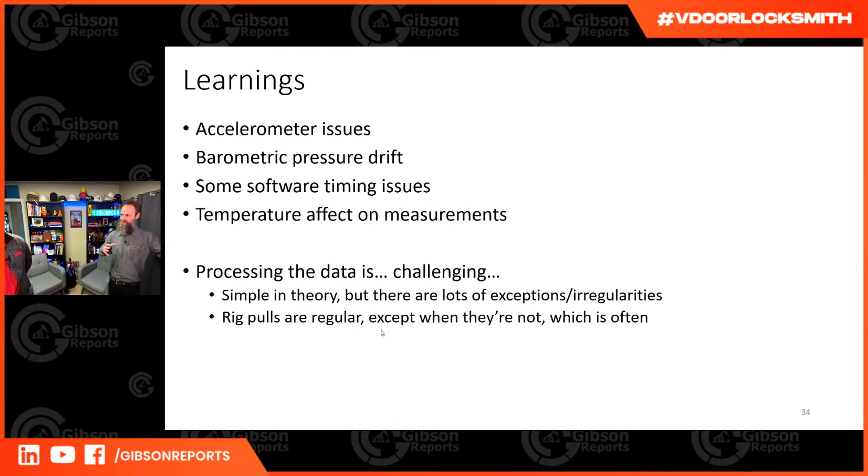So I got another piece to this. I took another piece on another device that had a barometric pressure sensor on it that was stationary, that would talk to the device that's moving up and down and tell the correction of what the barometric pressure is at a stationary point. So you could take this.

So that's not anywhere near good enough for what I need in terms of position. It's good for 6 inches, but it's not good enough to do what I need to do. So I have this accelerometer on there that you can correlate the two.

I didn't talk a lot about the load pickup and drop off. There's a lot of processing that I am in the midst of doing. If I wasn't on this road trip last week and next week, I would be doing that right now. But taking the accelerometer data and fixing that, because accelerometer data has its own issues.

The barometric pressure has its issues. Accelerometer has its issues. There's this load transfer that I can kind of synchronize to get a distance from one point to the other. But fusing all those up is the fun part.

But yeah, it's definitely a challenge, especially when you're dealing with bad data that I screwed this up. Oh, I had a temperature issue. Oh, this. So anyway,

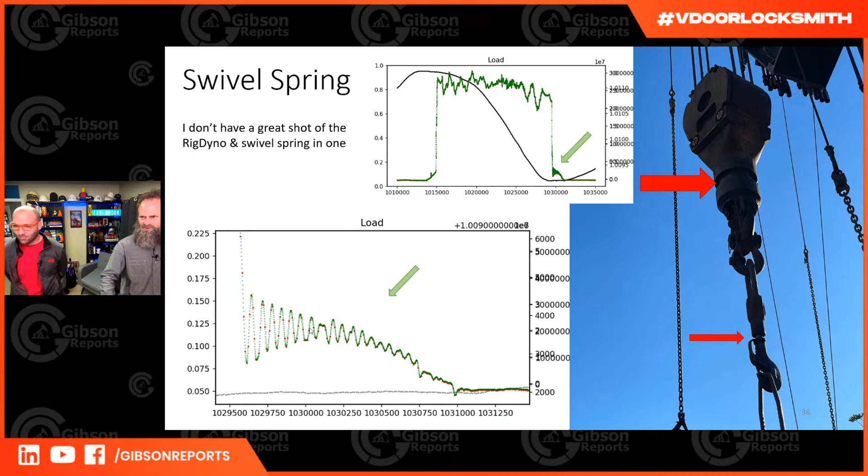This was 2 weeks ago, just before I left, and this is where I'm going to tell the fun story. So if you're watching the news, you know that California has had a bunch of crazy weather lately that we normally never have. So you get the call, buddy Rennick, hey, we're pulling a well.

Some of these I was doing it on the way in. I think it's better data coming on the way out, because it's under tension load. When you're going in to measure friction, it's like if the friction's working against it, you just reduce that amount of load by whatever it's being held up. If you're pulling it out, that's additive load. So I think that you'd get better data from pulling than from running in, but you could do it on both.

So anyway, now that I've fixed a bunch of stuff, I wanted to get data from a well that they were pulling. So I get this call, like, hey, dog, come on, you're coming with me. Hop in the car, get up there.

I'm checking the weather because the weather's coming in, the rain's coming in. I'm like, well, it says it's going to start at 10 a.m. and I'm going to get in there at 8. This is a shallow well, so they probably have it out in 2 hours. I'm like, I may be able to get in and out before the rain.

This is awesome, because that's not waterproof. It got rained on a little bit, but didn't short out. So pull the well, get everything. I get on the tailgate.

Because I have the SD card in there - in the first version, I had to take it apart to unplug the battery. So I'm on the tailgate, and it's raining. I see the real rain coming, and it's right there, across the street.

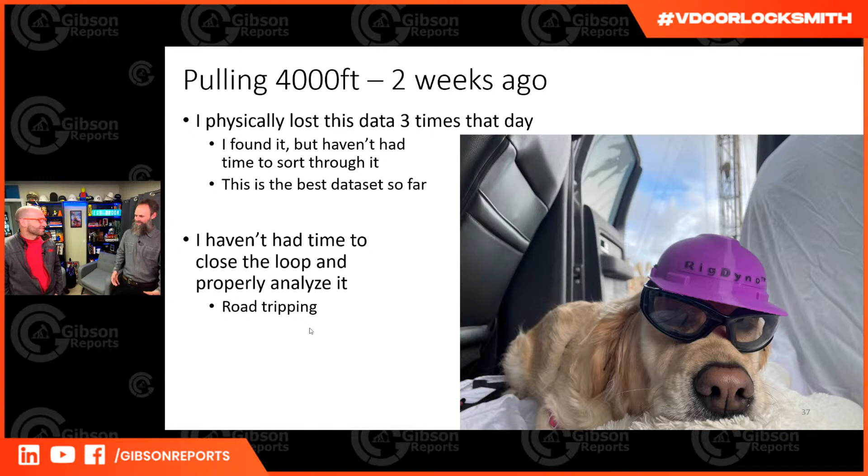So I find it, it's right here - that's the SD card. So I'm watching YouTube videos: how do you take apart a center console on an F-150? It's all snapped together kind of stuff, so pretty easy. So I get this stupid card.

So I lost it once on the tailgate, I lost it the second time through my own fault, into the little conveyor belt that sucks it into this area. So I'm there trying to pick it out with my fingers, and I'm sure you know this - like, oh, I should just go get the magnet on the little stick, or needle nose pliers. I'm like, no, I can get it. There is a black hole in an F-150 right where this arrow is, and it was like something reached out and grabbed it from my fingers and pulled it into this little black hole.

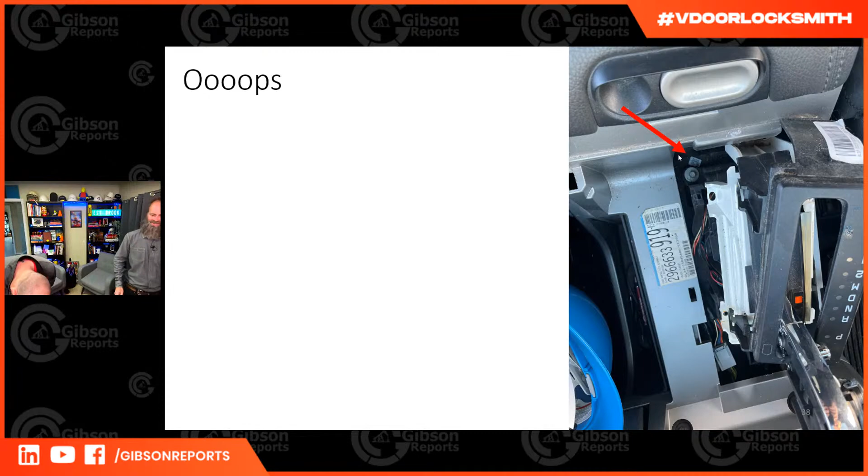So later that day, I had to take the whole center console apart to get to it, because it didn't fall straight down - it fell like a foot away, hit something and moved over. So anyway, this is the story, this is how this has gone. Nothing bad has happened. I put it back, put the center console back together, cleaned out all the dirt and dog hair and everything. So this is life of entrepreneurship right here.

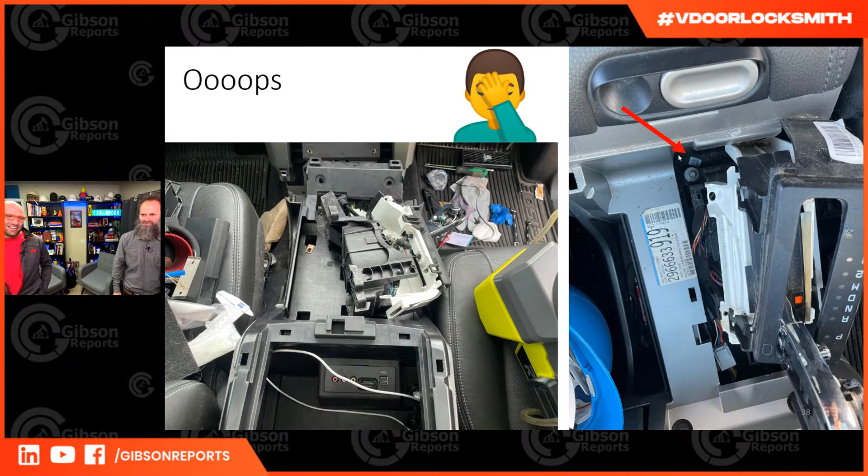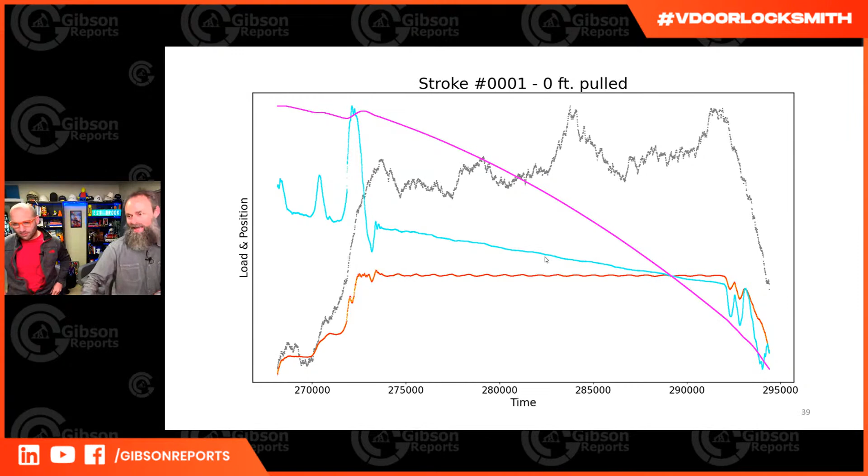Every time you integrate to velocity and then to position, those errors compound, and I haven't corrected that. But on this one, when they're actually moving and it was a relatively short time span, you can see that the purple line, the uncorrected, straight up integrated position from the accelerometer, and the gray position from the barometric pressure sensor, track pretty well. I'm going to get better than that because I haven't corrected any of that, haven't fused them or really had time to sit down with this.

What I wanted to show on this one, first of all, so 60 feet, that's California. We got 30-foot rods, and everywhere else they do 25-foot. Not sure exactly why that is, I should know that being from California.

But the fun thing here is this, the blue line is the velocity. You can see that the velocity was increasing, mostly flat here, but still a little bit increasing. And then, here we go, so we get near the top, and the guy slows it down, and the velocity drops all the way down, and then they're just right about at the top, and it goes back down to zero. So all these velocity changes affect the load that's applied because it's dynamic.

The wave equation should remove that. So this plot right here, when I have time, probably a week from now, I'll crawl into a little hole and take all this data and crunch through it. But that should equate to a line that corresponds to friction acting along this length of rods.

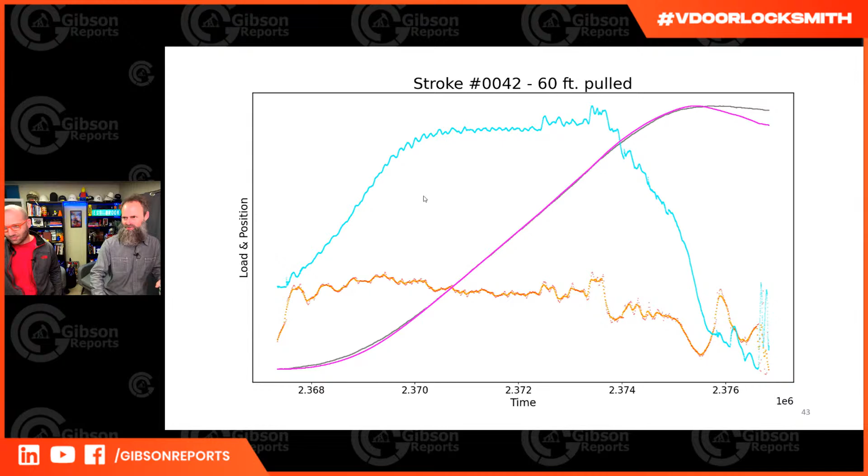Yeah, so I picked out some random ones. Here's the 7th stand of rods, and then I skipped ahead to the 42nd. You can see the load drop off between these two because there's a lot less rods in the hole. So if I compare this one against that last one...

There's a load difference, but the amount of friction acting on that should also be different. And it should be different because of the side load that's applied, because there's less tension up high since there's less load on the rods. But it should also be significantly less, because if the bottom rod has passed some deviation in the wellbore, now it's not acting on that. So that's the comparison that I'm so close to getting.

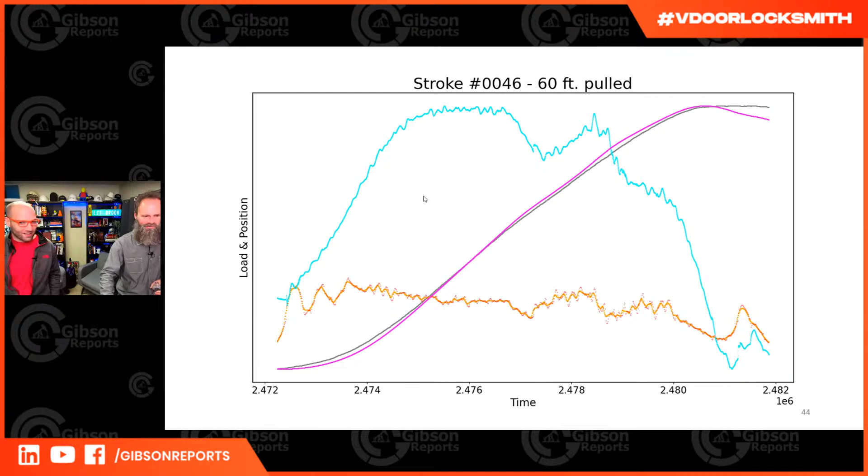Well, don't stop now. I mean, this is definitely some fascinating stuff, and how all of it correlates right back into the torque and drag when we're drilling the wells.

Yeah, so I just threw these guys in here. I guess this is mostly wrapping it up, but there's no torque in this, it's just strict drag analysis. I do actually have this other project I'm working on, I was going to talk about some torque stuff, a whole other aspect of it that's going to be cool in itself, but I'm not ready to go blabbing about that.

The cool thing about this is you strap that onto the workover rig, and then the rig crew just does what they normally do. So it's basically free data, it's amazing. If I told somebody, hey, I want you to go pull a well because I want to map your friction, that's crazy. But you're already doing the thing that's costing a lot of money, so just throwing that on and gathering the data, it's already there. Just capture it. That was the impetus of that.

It's also different from a torque drag analysis, because this is metal on metal, or sometimes we use fiberglass rods, or sometimes there's thermoplastics in the well from coated tubing or rod guides. So there's different friction properties at play in a cased hole, inside tubing, rod on tubing, than there is in an open hole.

I don't understand the friction in an open hole. All I've ever dealt with is the metal on metal or fiberglass on metal stuff.

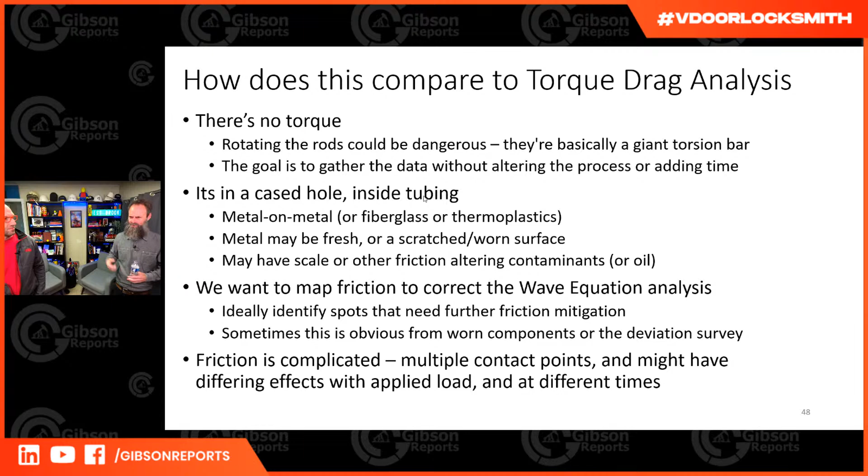What else do I need? Friction is complicated. There's all these different contact points, and I didn't even play the video where I show the echo of an impact going up and down the rod string. These rod strings are moving in different directions at different times. It's a very complicated system. It's hard to wrap your head around, let alone all the friction in there.

Let's see what else. So what's the point? Yeah, so the workover rigs, it's the most expensive thing you're going to do on a well. You actually use workover rigs to abandon wells anyway. But the whole thing about drilling affecting the life of the well is workovers are the most expensive thing you're going to do, because you got to get a 4-man crew out there. They got to work for a couple days. If something breaks, then they got to do fishing jobs. It's a very expensive thing. You'd ideally like to minimize that, but if you're doing something that's very expensive and you're getting practically no data out of it...

So this is something that, if you could throw it on, you could get a wealth of data. If nothing else, you could see what the rig crew was doing. They're not going to like it, but how fast were you running the rods? Were you dropping the rods too fast? Some companies have rules like speed limits, don't drop the rods too fast because you could damage them. How do you enforce that? Well, something like this could do that.

When did the rig crew take lunch? Probably not going to like that, but there's some other pieces like the live view. A lot of things, like when you're trying to find the bottom of the hole, the guy really, it's just up to his judgment. Did he feel that? Did he feel it hit bottom? This could tell you, like live, you could see it. There would be no question about were you on bottom.

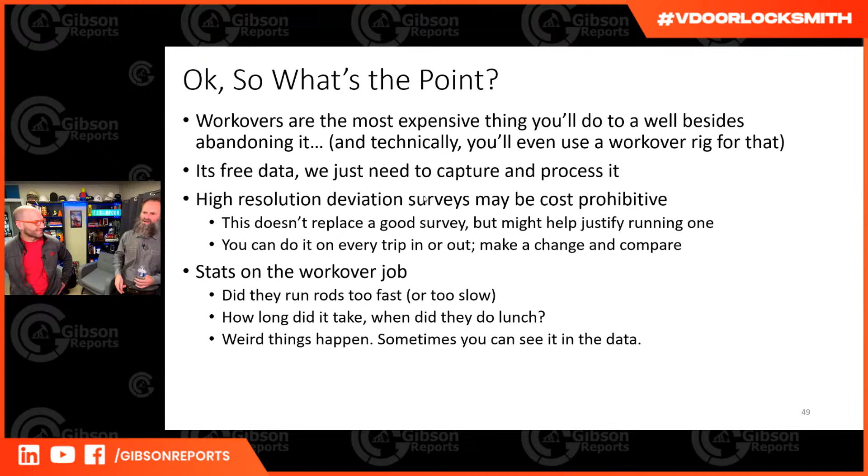Yeah, so it's a science project right now, but I did get the patent on it. So if anyone wants to talk about that, that'd be a fun discussion.

I don't know if there's any applications in drilling. I mean, the position sensor, knowing where your blocks are relative, maybe knowing something more than the stretch of when you have the rotary encoder on the drum telling you how much is in the hole. Is that accurate enough, or do you need something more accurate that can run on the blocks and tell you where they are specifically, as opposed to through a stretchy length of cable? I don't know, not a question I can answer. Yeah, I don't know anything about drilling.

I think there could be some drilling applications, but that's a conversation for another time.

Well, I'll throw it the other way. There's probably some applications for the torque or drag analysis models in the production world, but we don't share those, they aren't shared with us very readily. So if somebody has drag analysis software and wants to talk about that... nobody in production really wants to spend any money because we're trying to reduce our cost, because every time a well fails because of something that's crooked in the wellbore, we don't have a lot of funds to spend on fun stuff like this.